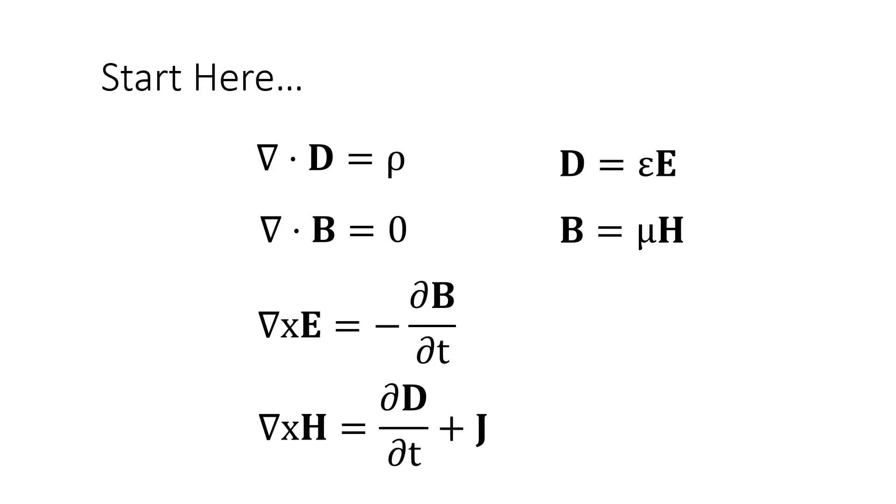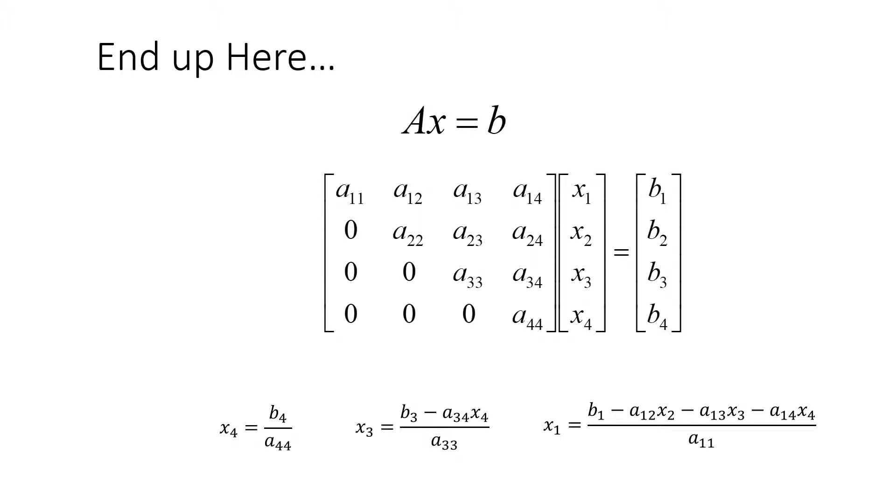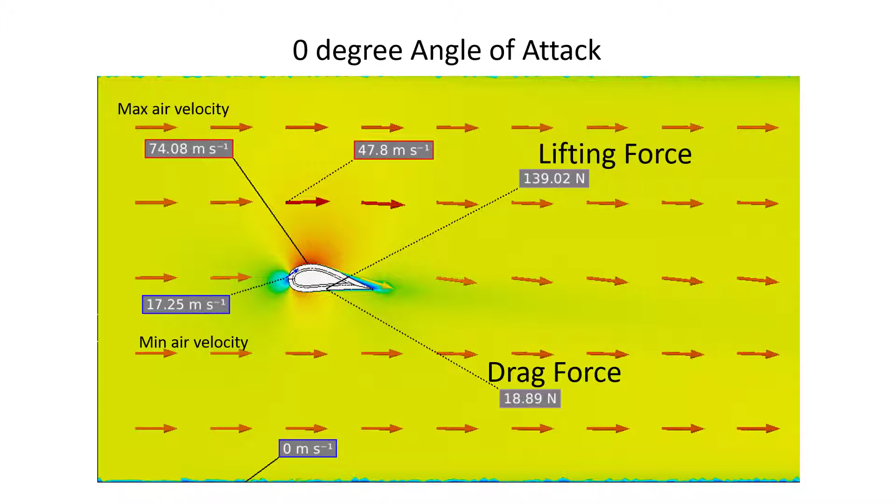So how do we know what's useful? Most users of physics-based simulation are engineers who are interested in designing and building things, and they have figures of merit in mind. Will the wing of an aircraft provide the right amount of lift at takeoff, or will there be too much drag for a given angle of attack? Will the dozens of wireless devices in a modern home, like cell phones, game consoles, and smart light bulbs, interfere with each other?

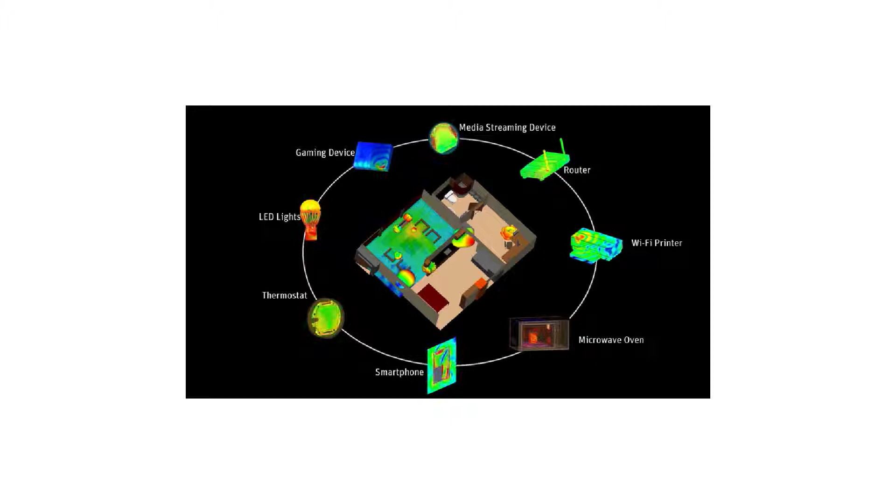Simulations provide evaluation of early design concepts that can help answer these types of questions. But it doesn't stop with early assessment. Simulation models can become very complex and accurate and account for any number of environmental conditions or use cases. They serve as a prototype that can be tested against the laws of physics, all within a computer. In fact, we use the term virtual prototype to differentiate between the physical test article and the simulation model.

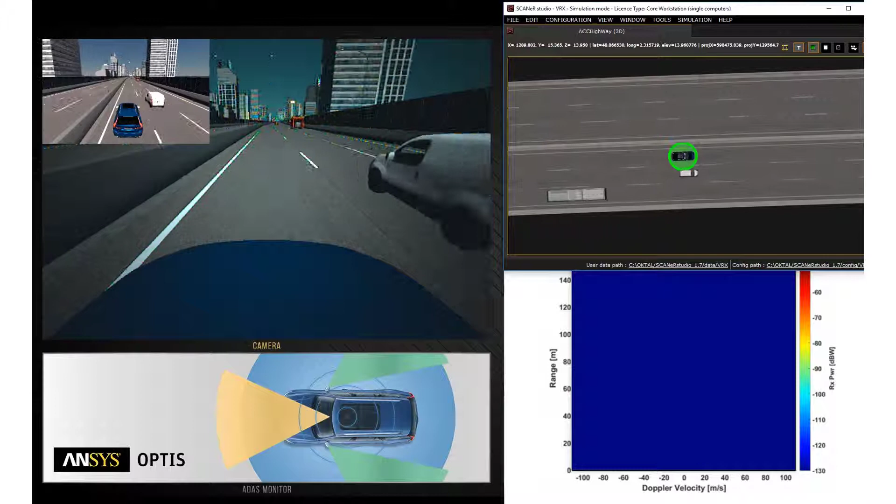This is where project-based learning and simulation complement each other. There is no better way to teach the concepts of iterative design than through meaningful projects where simulation and physical prototypes are part of the plan from the very beginning. Here is how it's done today across all disciplines of engineering and industries.

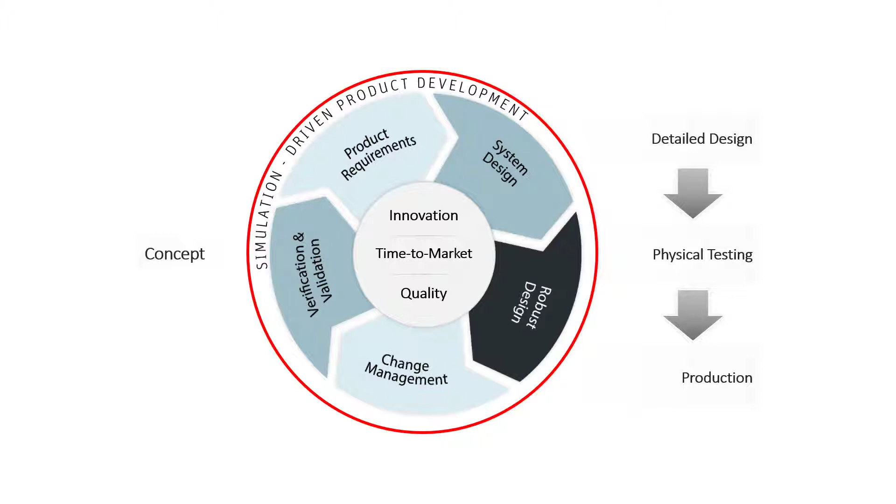Start with the idea or concept. Build the virtual prototype along with the system requirements and verification criteria. Generate the results. If it doesn't meet the requirement, or the requirement perhaps changed, iterate the design here before spending time and money on the physical prototype. When the detailed design is acceptable, proceed to the physical test article or directly to the product manufacture stage.

You'll find that most students really enjoy running simulations, especially when it's tied to a challenging and interesting project. Once they go through an iterative cycle the first time, they'll pick up the concept fast. As a teacher, you'll benefit from simulations and can use it to support the math, physics, and engineering concepts in your curriculum. In another segment, we'll introduce some concepts and terminology that will help you start your journey in virtual prototyping.